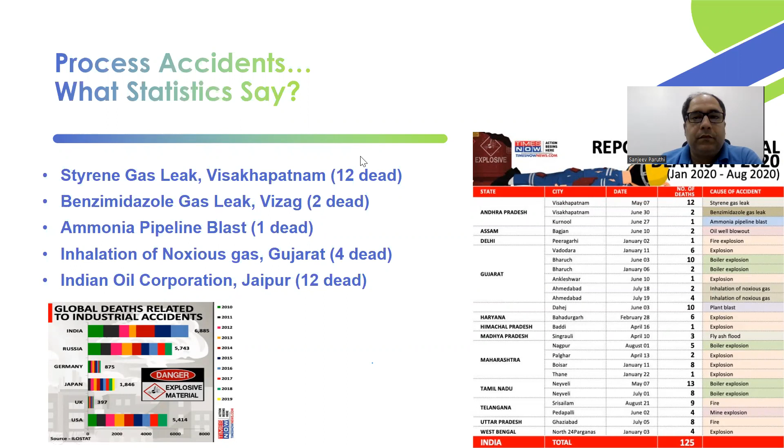So basically, process safety management is a system, and it is a concern for anybody who stores, handles, processes, and manufactures hazardous chemicals and gases. A lot of chemical risk is inherently present due to the presence of the material, the process conditions, or the type of equipment. So the risk related to process safety should be managed properly, through avoidance of the risk, or it should be isolated.

So this small presentation on process safety management will definitely help you to understand why there is a need for process safety and process safety culture transformation in a very structured, very systematic fashion.

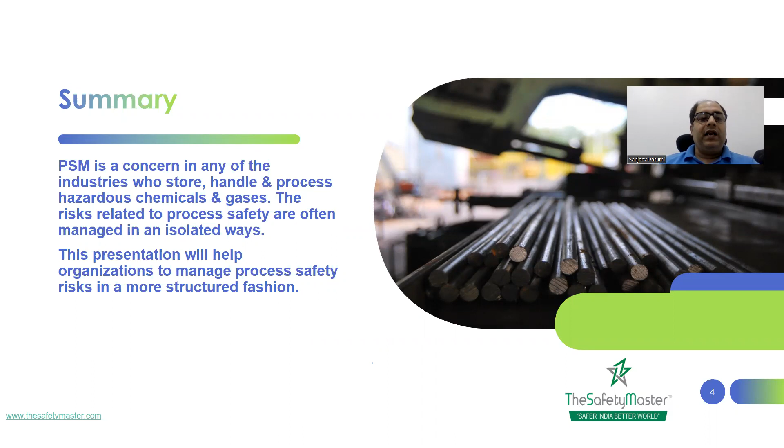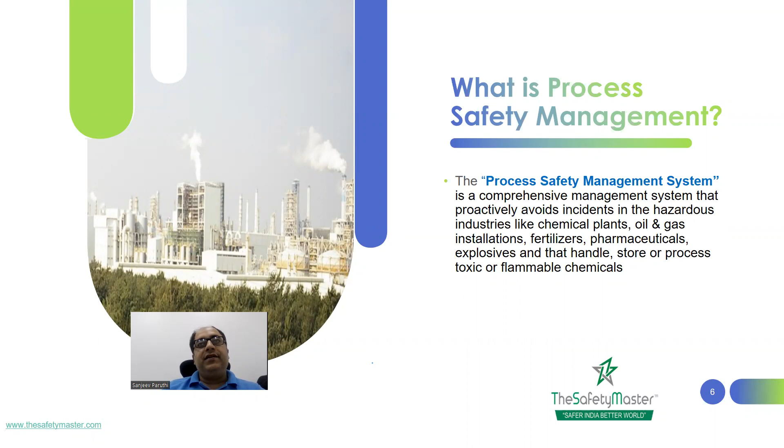So let's begin with a few things. What is process safety management? Process safety management is a comprehensive system for the chemical industry that, when you implement it, helps you avoid incidents like the leak of hazardous substances. So it is a very important system if you implement it in a chemical industry. Your industry can be safer, and catastrophic accidents can be avoided.

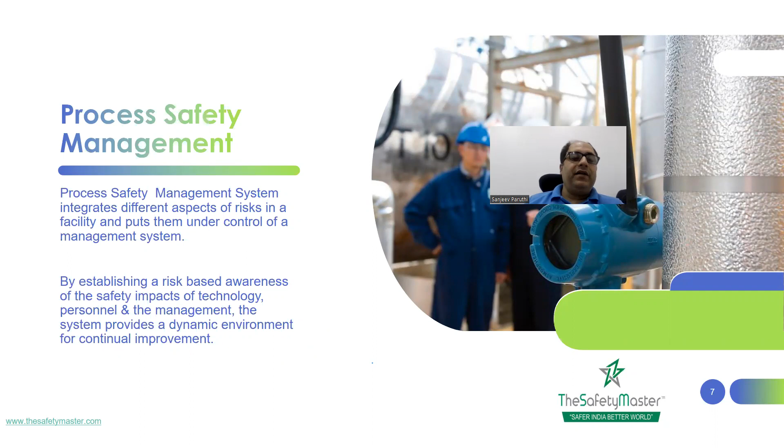So process safety management system basically integrates the aspects of risk into the facility, into the processes, through a controlled management system of safety that is called process safety management system. And by spreading awareness of such a system in terms of process hazard identification, analysis, technology information, and the impacts on technology, people, equipment and the business, it provides you a very dynamic environment where you could avoid the catastrophic accidents which were shown to you.

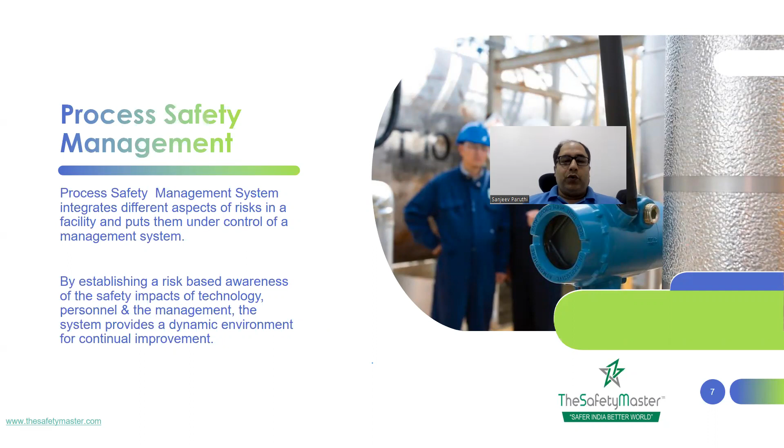Let us understand what are the different 14 elements for process safety management. So you can see that employee participation, process safety information, process hazard analysis, operating procedures, safe work practices, contractor safety process, training, pre-startup safety review, mechanical integrity, management of change, emergency response plan, trade secrets, accident investigation, and compliance audits. The systematic implementation of these 14 elements can help you to reduce the risk in the

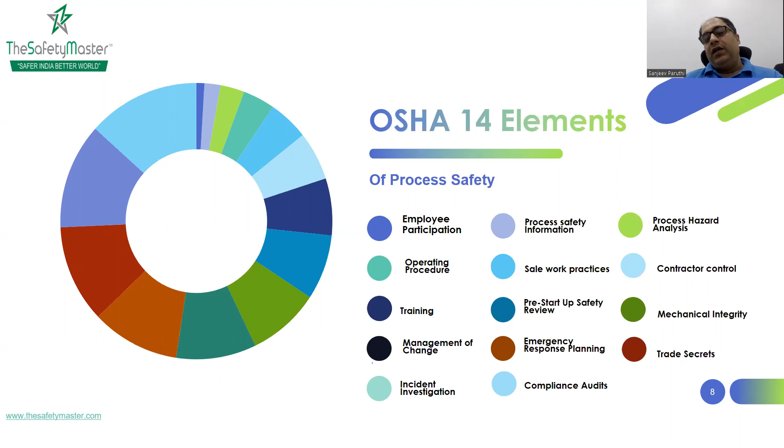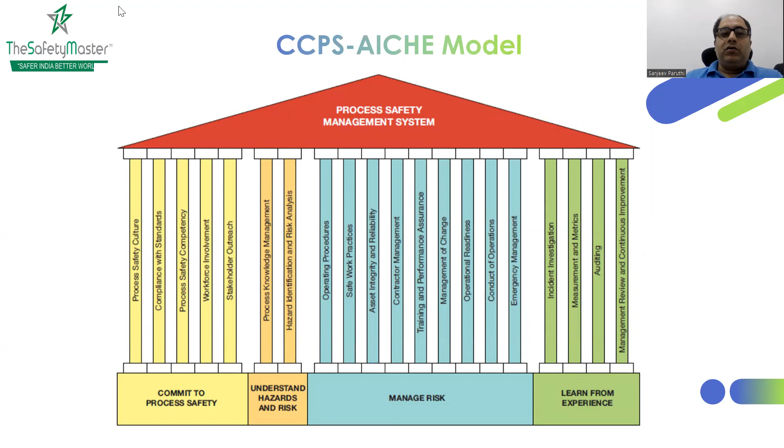Let us understand what is employee participation. Developing a written plan of action to implement employee participation is a key part of the process safety system, and you need to consult your people, provide them the platform to participate, take their views even at the operator or contractor level for the process safety. So that is called employee participation, and provide access to the safety information.

So it is a very amazing element, and this is the starting point for process safety, and it helps you to analyze your hazards, quantify the risks, and implement the complete process safety management system. As long as you don't have this process safety information available with you, it would be very difficult for anybody to implement the process safety management system.

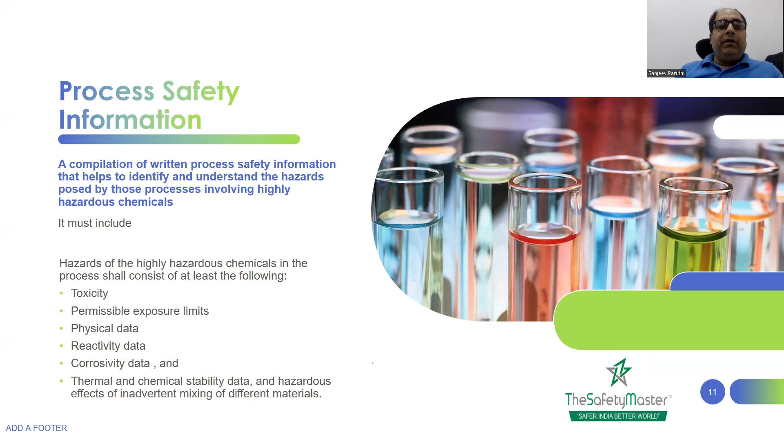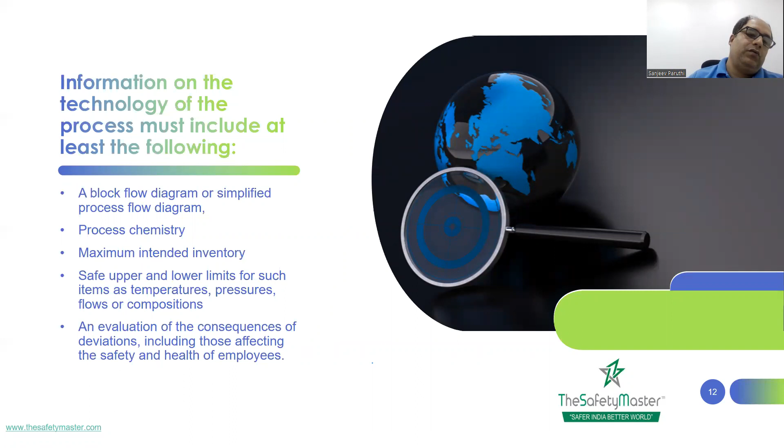So this information also talks about the process technology part, the process chemistry part, the maximum intended inventory, and also the process conditions, the upper and the lower limits of the process conditions, and also the control loops and the consequences of deviations, including what are the impacts on the people and the business.

So then there is another element called process hazard analysis. Today I will only talk about these two elements, because it's a very short session. I just want to give a little bit of awareness about process safety management and

chemical safety. So process hazard analysis is also a very important element for process safety management, and it talks about identification, evaluation, and controlling of the process hazards, material hazards, and the equipment hazards involving highly hazardous chemicals or energies. Different kinds of methods are available, like the what-if method, checklist method, HAZOP, FMEA, fault tree analysis, QRA. All these are the tools that come under process hazard analysis.

So it's a complete procedure. Every tool under the process hazard analysis element has a different sort of importance, and there should be a risk matrix available to conduct this particular tool.